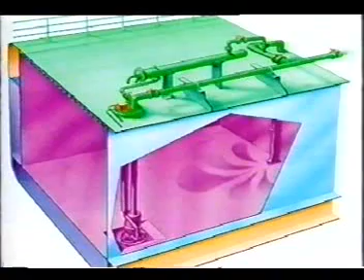In this video, we will highlight correct operation of FRAMO cargo pumping systems during loading, discharging, stripping, and tank cleaning. The FRAMO system can also incorporate heating, cooling and circulation of the cargo, all up to the owner's requirement.

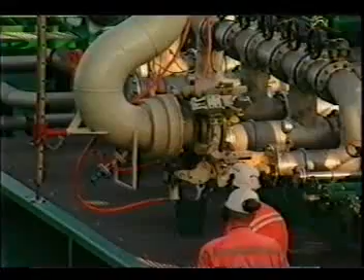Sequence number 1. Loading the cargo tanks. Correct operation of pumps and valves is essential to avoid pressure shocks in the cargo pipeline system during loading. Pressure shocks may cause severe damage to pipelines, hoses, loading arms and cargo pumps.

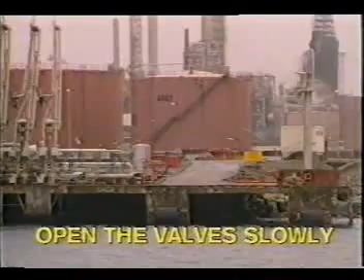To avoid pressure shocks, start the loading slowly and don't open or close the cargo valves in the system too quickly, especially where long pipelines and high flow rates are involved.

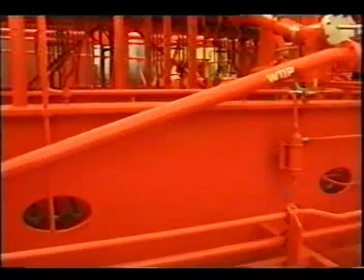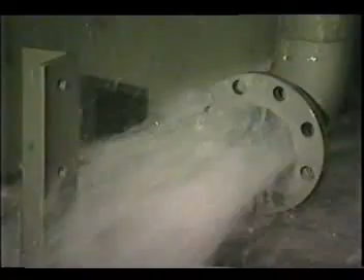FRAMO recommends installing a separate cargo drop line to obtain a satisfactory loading rate and to make it possible to bypass the cargo pump during loading. This is a recommended cargo pipe layout in a FRAMO system.

If bypassing is not possible due to valve arrangement, use the following procedure to avoid pressure peaks in the cargo piping during loading. Keep the manifold valve closed until the cargo reaches the manifold, then open the manifold valve partly to fill the cargo line on deck.

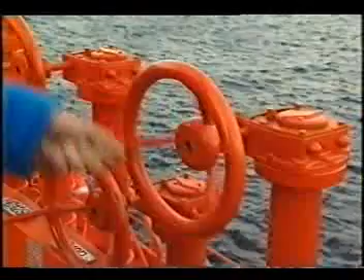Open the cargo drop line valve and pump discharge valve slowly until you reach maximum capacity. Remember, maximum loading pressure is 8 bar, measured at the top of the pump. Continue to load through the drop line and the cargo pump.

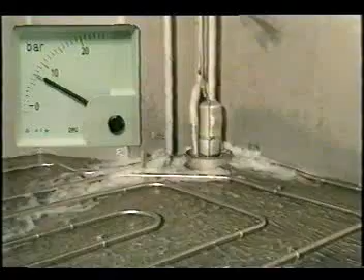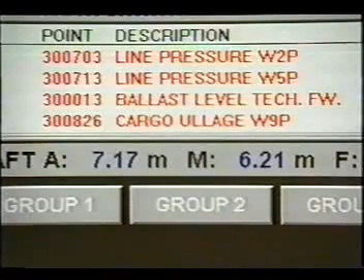If the ship is not equipped with a drop line, follow the same procedure except for operation of the drop line valve. Most ships today have an integrated computer system which takes care of control and monitoring of all activities within the cargo tank section, such as pump capacity control, valve control, temperature and ullage control.

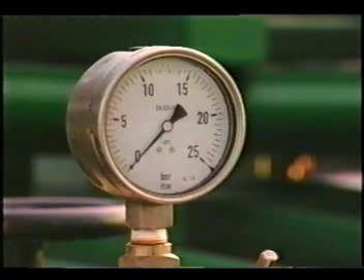If the loading has been stopped and the cargo valves are closed, it's important to restart the loading by following the same procedure as described earlier.

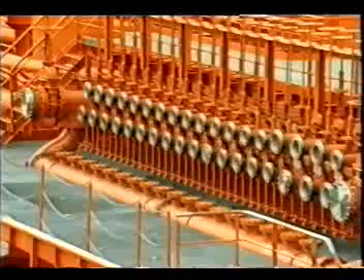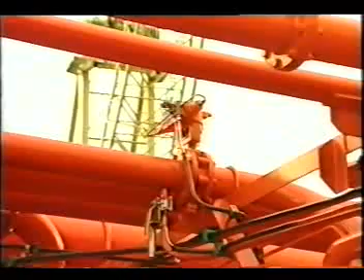Finally, some small differences in the loading procedure may apply for a chemical carrier, a product carrier, OBO, and crude tanker, but the main rule is the same: all valves which control the liquid flow should be opened slowly. The time taken for the power-operated valve to move from open to shut and from shut to open must be checked regularly at their normal operating temperatures.

Sequence number 2. Discharging of parcel cargoes. Start the hydraulic power pack and increase the hydraulic system pressure.

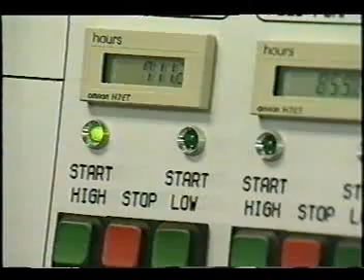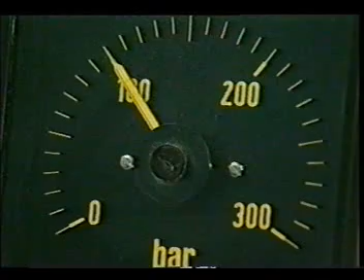If the hydraulic oil temperature is below 20 degrees centigrade, circulate the oil through the heating valve at maximum 100 bar prior to raising the hydraulic system pressure to approximately 150 bar.

Start the cargo pump slowly and let it run with hydraulic pressure 40 to 50 bar for approximately 1 to 2 minutes with closed cargo pump valve.

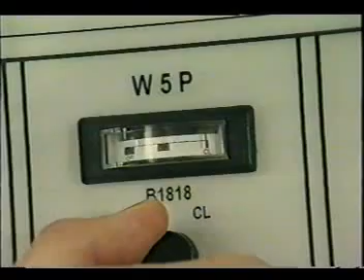Raise the pump's discharge pressure above manifold pressure to avoid backflow or overpumping, then open the cargo pump discharge valve. Increase the hydraulic motor pressure until required discharge pressure or capacity is achieved.

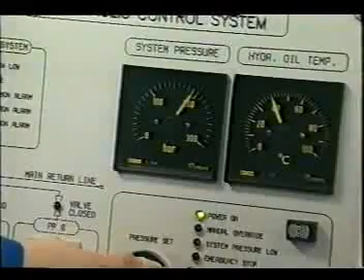If required, increase the hydraulic system pressure. Follow the same procedure for the next parcel. Ensure that enough hydraulic power is available; if not, the hydraulic pressure will drop and the capacity head will be reduced. The hydraulic system pressure must be slightly above the highest consumer pressure.

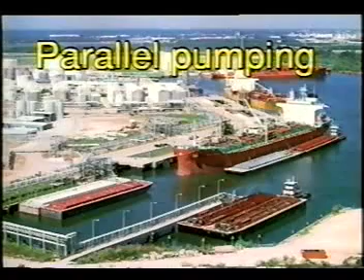Discharging of homogeneous cargoes, parallel pumping. Running centrifugal pumps in parallel is, for example, when discharging the same type of cargo with a number of cargo pumps through a common shoreline.

With FRAMO cargo pumps this is easy, as the FRAMO system gives the operator maximum flexibility and stepless speed and capacity control of each individual cargo pump.

Nevertheless, in some cases we've seen that small misunderstandings in the important relationship between the pump speed, number of pumps running, ullage, and number and size of shorelines may delay the discharge drastically.

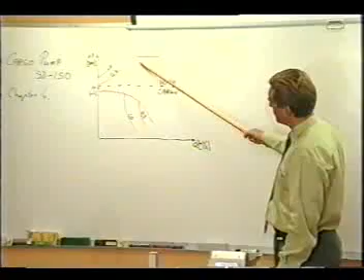For optimal understanding, FRAMO training courses in operation and maintenance are arranged worldwide, all year round, by the professional FRAMO training team, and there's no doubt that professional training is a good investment for the ship, the ship's crew and the ship owner.

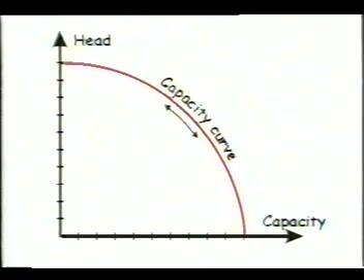The capacity of all centrifugal pumps varies very much with the head, or the pump's back pressure. If the head is very low, for example when pumping just over the rail, the capacity is very large. But if the head is very high and goes to maximum, the pump capacity goes to 0.

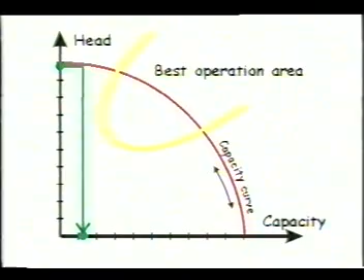In order to have a successful discharge of homogeneous cargo, try to avoid too many bends and T-pieces, and never use valves and pipe diameters that are too small.

Start the cargo pump using the same procedure as for parcel cargoes. Always start the cargo pumps with the discharge valve closed.

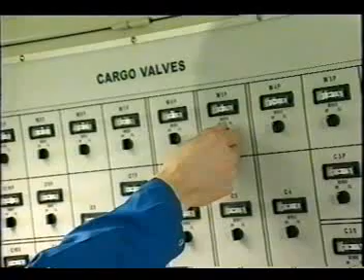Raise the cargo pump pressure above the shoreline pressure before opening the cargo valve to avoid backflow and overpumping. The hydraulic system pressure should be maximum 15 bar above the highest consumer pressure, cargo pump, in order to minimize energy consumption, maintenance and wear and tear.

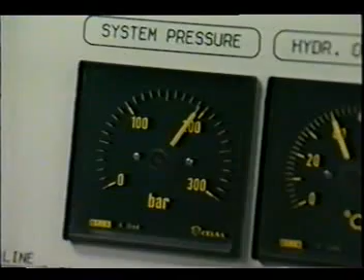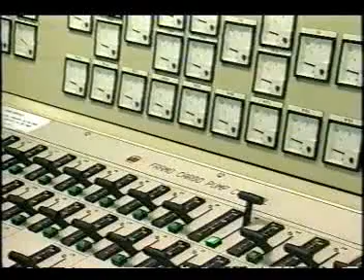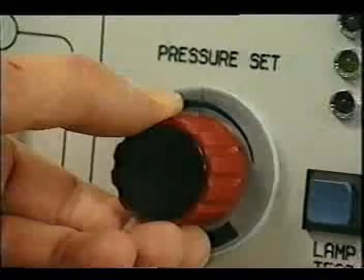Cargo pump capacity should be controlled by the pump speed and not by throttling the cargo discharge valve or any other valve in the cargo piping system. This can be achieved easily by keeping all cargo controllers in maximum position and regulating the main hydraulic system pressure until required discharge rate is achieved.

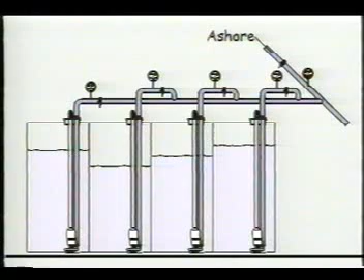If necessary, each cargo pump must be balanced individually by decreasing or increasing cargo pump hydraulic pressure. Generally, we recommend running as many pumps in parallel as practical at a reduced hydraulic pressure, rather than just a few pumps at maximum hydraulic pressure.

Remember, 2 pumps at 100% capacity give the same discharge rate as 4 pumps at 50% capacity. The advantage is reduced hydraulic system pressure, reduced speed and sound level, and increased lifetime.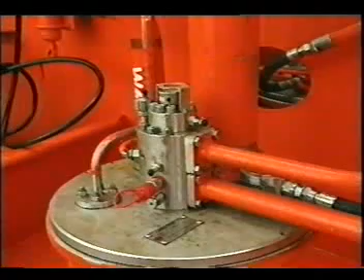However, in some cases, for example when discharging cargo with low specific gravity and very long shorelines, we may have to run the cargo pump with full speed to meet the discharge pressure at the rail.

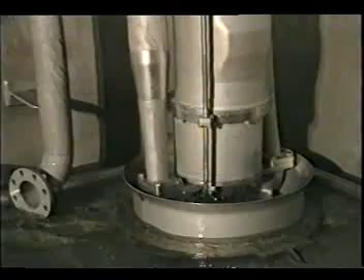Reduce the cargo pump hydraulic pressure to approximately 100 bar at the end of discharging, or when the pump starts to lose suction, indicated by vibration and hydraulic pressure pulsation. This is to avoid hunting and dry running of the cargo pump.

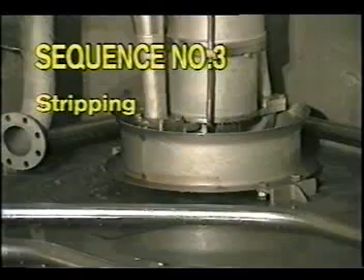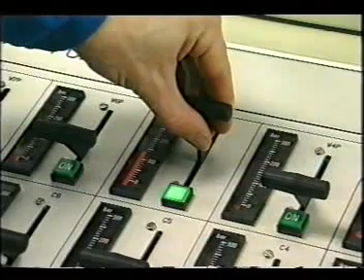Sequence number 3: Stripping. At the end of discharging, when the cargo tank is nearly empty, we're in the stripping condition. To obtain the best possible stripping result with minimum wear and tear on the pump, we recommend the following procedure.

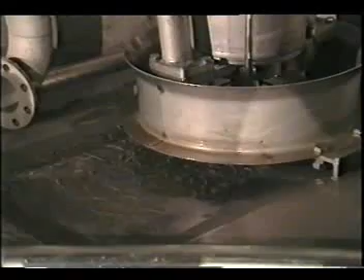Empty the cargo tank at reduced cargo pump capacity. The pump capacity, in other words the hydraulic pressure, has to be adjusted according to what type of cargo you're pumping, the cargo's specific gravity and viscosity. When the cargo tank is empty, close the cargo valve and stop the pump.

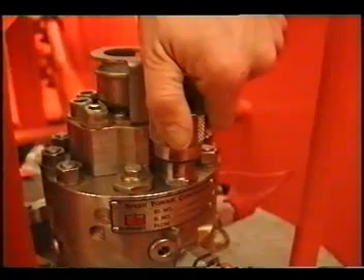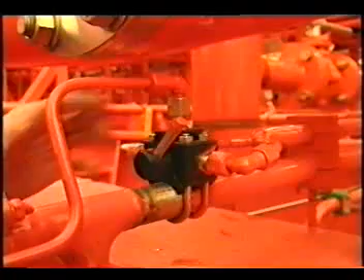The best stripping result is obtained with lowest possible back pressure. Purge and empty the cargo deck line. On this ship, the stripping valve for the cargo pump is remotely operated for easier operation.

Start the cargo pump locally and increase the pressure to approximately 80 to 100 bar. Open the valve on the stripping line. Regulate the air inert gas pressure with the inlet valve and strip the remaining cargo into the deck line until the cargo tank and cargo pump is empty.

Close the stripping valve, stop the purging and stop the cargo pump. Repeat the stripping sequence if necessary.

To sum it all up, we will highlight the 4 main steps schematically. Step 1: End of the discharging. The cargo pump is running at reduced speed. Cargo valve and manifold valve are open until the cargo tank is empty.

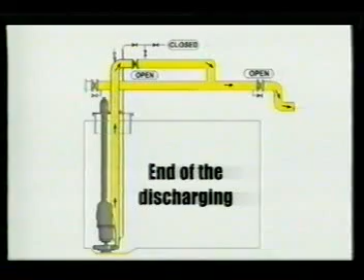Step 2: Purging of the cargo deck line. When the cargo tank is empty, close the cargo valve and stop the pump. Empty the cargo deck line by purging with inert gas. Close the manifold valve.

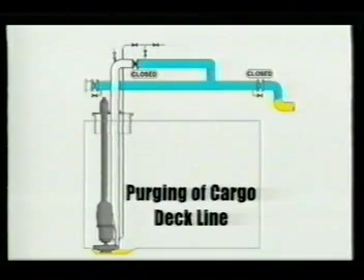Step 3: Relieving the pressure in the cargo deck line. Open the small stripping valves on cargo pump deck line to minimize back pressure in the line.

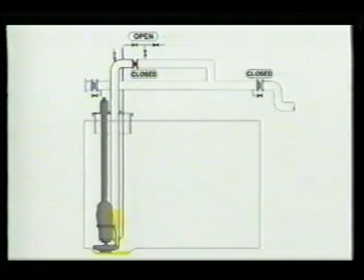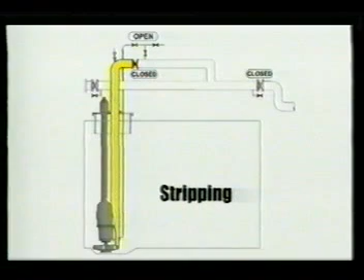Step 4: Stripping. Start the cargo pump locally and increase the pressure to approximately 80 to 100 bar. Connect the air inert gas supply to the cargo pipe and strip out the cargo through the small stripping pipe. Purge until the cargo tank and pipe stack is empty.

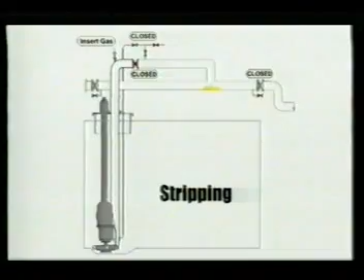Close the stripping valve and stop the pump. By following this procedure, you will achieve an excellent stripping result. And remember, when the discharge and stripping operation are completed, purge the cargo pump's cofferdam.

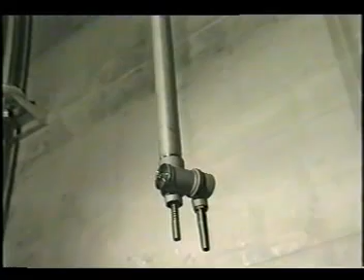Sequence number 4: Tank cleaning. To keep a dry tank top and still avoid dry running during tank cleaning, the tank cleaning machine's capacity, flow into tank, and the cargo pump's capacity, flow out of tank, must be equal.

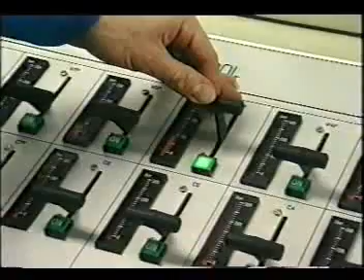Reduce the cargo pump hydraulic pressure until the capacities are balanced. Before tank cleaning is finished, close the pump's discharge valve and open the stripping valve to allow an increase in water level.

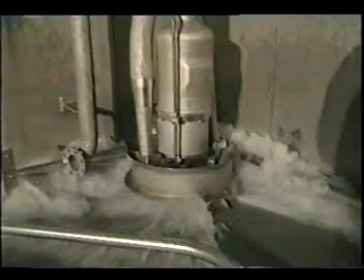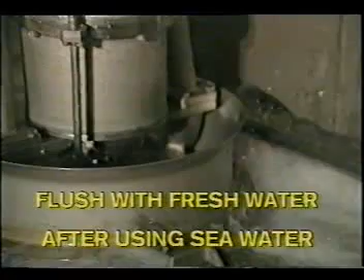Run the pump at approximately 110 bar against the closed cargo pump discharge valve for 1 to 2 minutes to clean the cargo pump. Remember to flush the pump and tank with fresh water if seawater has been used for tank cleaning.

By following these instructions, you will achieve an energy-efficient discharge, no pressure shocks during loading, and minimal wear and tear on the cargo pumps during stripping and tank cleaning. In other words, lower operation and maintenance costs for the ships, as well as for the owners.